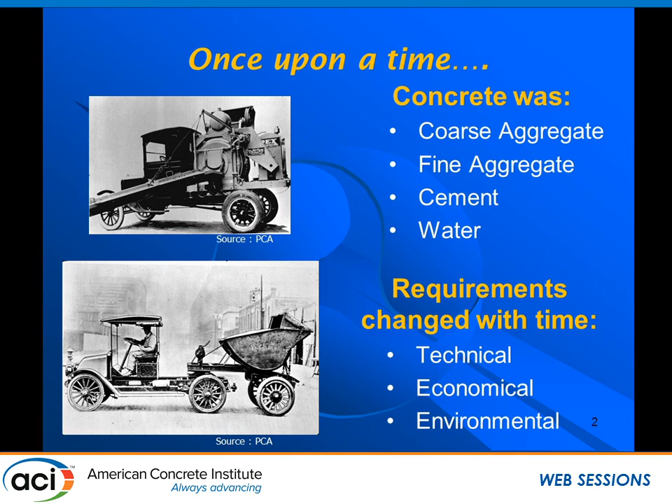When I went to school, not too long ago, back in Brazil, when I was a teenager in high school and first fell in love with concrete, I learned that concrete was coarse and fine aggregates, cement, and water. Since then, the technical, economical, and nowadays environmental requirements have changed quite a lot.

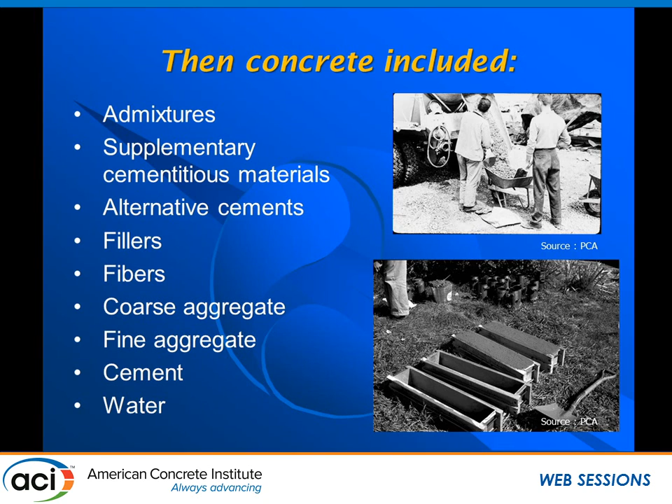We got to a bunch of different things that drive us nuts in the field: admixtures, supplementary cementitious materials, fillers, fibers, and our conventional concrete. Nowadays we've been trying to push the envelope more to use high volume fly ash mixes. We're not quite there yet, but we have to overcome some challenges first: delayed setting, reduced early age strengths, and increased sensitivity to curing conditions.

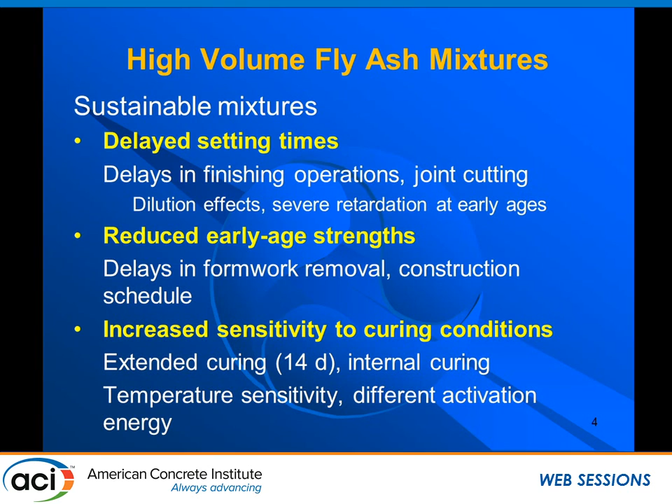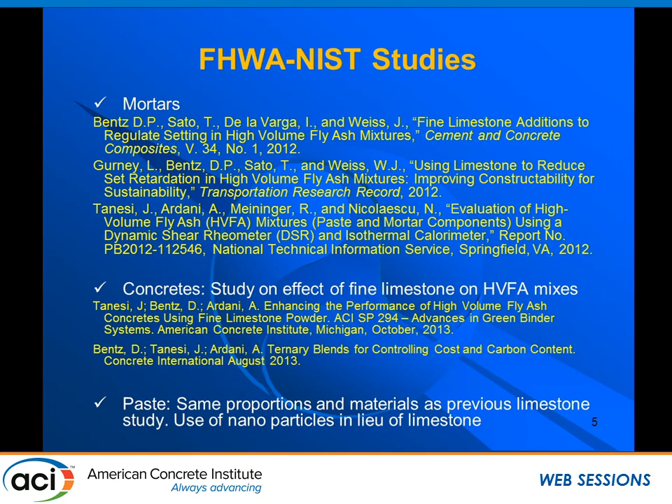Everybody talked about this in the previous presentations. In the past few years, both NIST and FHWA have been working on high volume fly ash, and we have some of our studies there. They worked on fine limestone additions, we worked on testing procedures, and together we worked on concrete mixes. So first we started with mortars, we went to concrete, and now we are stepping back to pastes, and in this case we are using nanoparticles as well. So here is most of my talk based on.

We have several mixes. We have a PC mix that was based on one of our concrete mixes from the previous study, and we replaced by volume, keeping the volumes constant - that's very important. We replaced the cement content by volume by 60%, either F fly ash or C fly ash, or a combination of fly ash and 15% limestone, or fly ash and 1% of different nanoparticles.

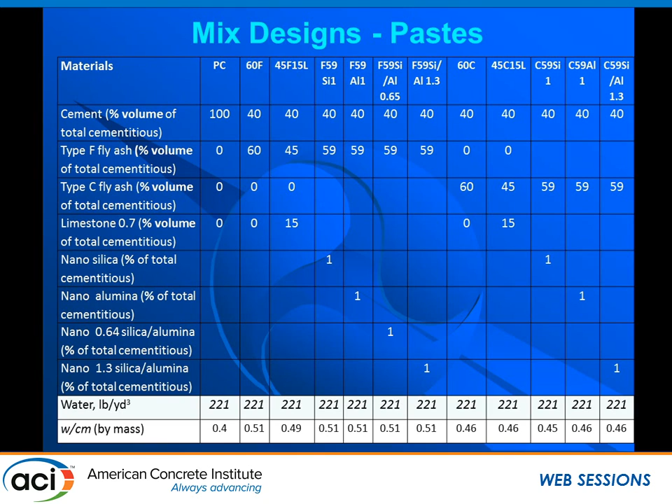Since we kept all the volumes constant, the volume of water is constant for concrete, the water to cement ratio changes in the different groups.

Let's have a look at the setting. Here in red is our PC mix. The greens, in both cases, don't look very green, but the greens are the fly ash and cement only. Then we have the 15% limestone in blue, and we see we accelerate quite a lot in both fly ash C and fly ash F mixes.

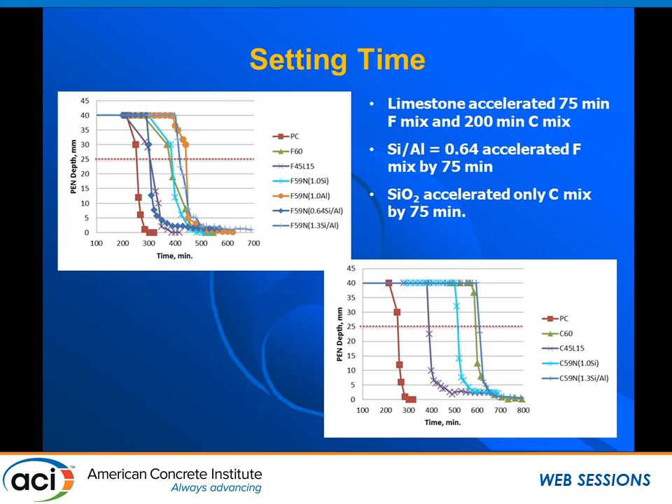We have for the F mix a 75-minute acceleration, for the C a 200-minute acceleration. Another mix that accelerated the setting was the 0.64 silica to alumina ratio, shown in blue here. All the other nanoparticles for F either did not accelerate setting or even delayed it slightly. For the C fly ash, the Nano Silica accelerated slightly, but not as well as the limestone.

So we ran rheology tests. Our rheology test protocol was: we had a pre-shear, then we increased the shear in 10 steps, and then decreased the shear in 10 steps. We used this curve to plot shear stress over shear rate, and with this curve, I have the slope as apparent viscosity, and the intercept is our yield stress.

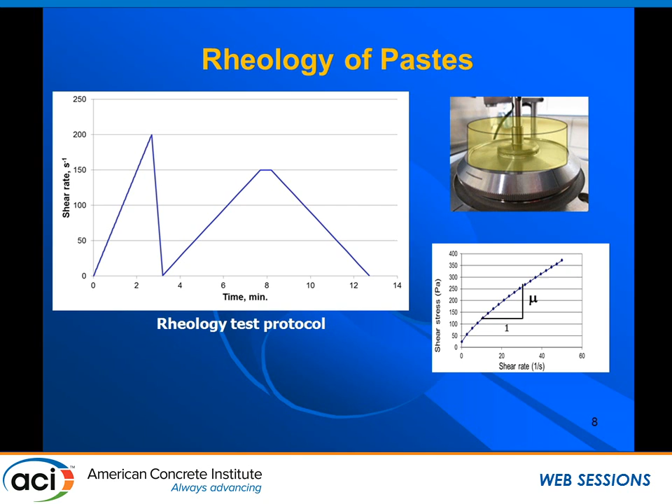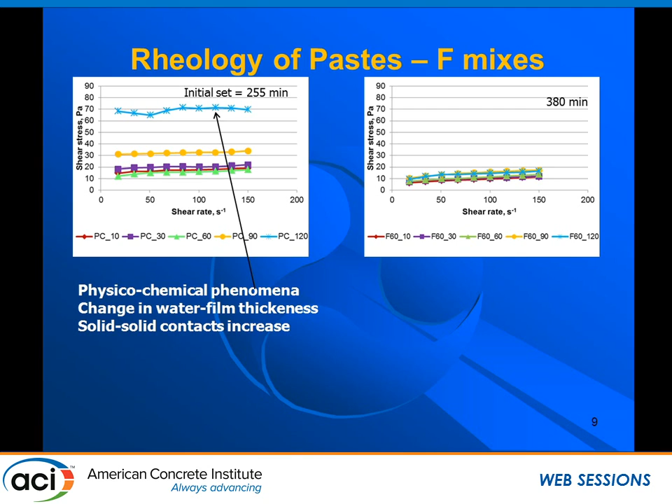Although we are not close to the setting time, we already see something going on. At 90 minutes, we see a change in the curves. What's happening here is that the water film thickness around the cement grains is changing, so the solid-solid contacts increase. For the F-fly ash mix, nothing appears to be going on - there is no apparent agglomeration at this point. If we look at the 15% limestone, again we see something happening at least at 120 minutes. For the Nano Silica, nothing is happening.

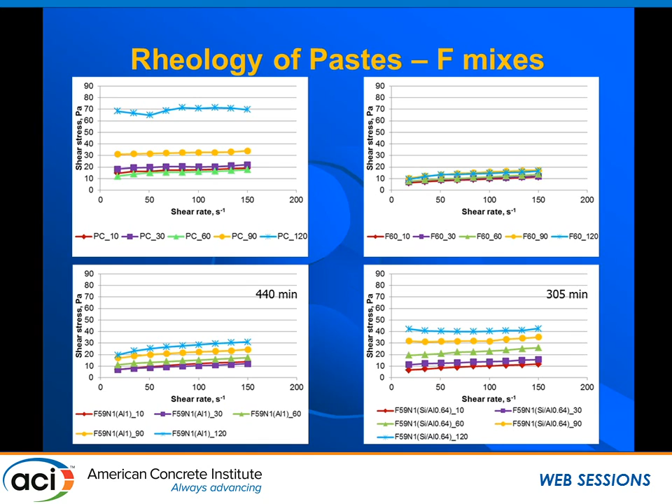For the Nano Boehmite, something seems to be happening at 120, but not significant. Then for the silica-alumina ratio of 0.64, definitely something is going on. Not only is it increasing, but the slope at 120 minutes is inverted.

What's going on? We believe agglomerates are forming, and as we increase the shear rate, we break those agglomerates. When we decrease the shear rate, these agglomerates are capable of reforming, so we get a negative slope, giving an impression of negative apparent viscosity, which isn't possible. We're really just seeing agglomerates forming - something in the microstructure is changing.

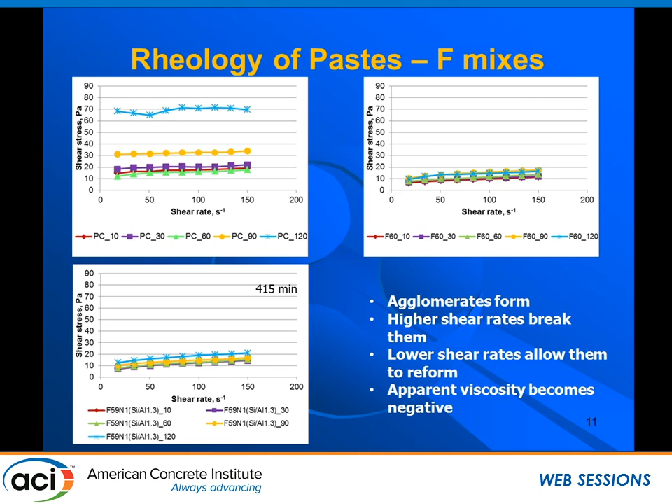For the silica-alumina ratio of 1.3, nothing seems to be happening again. Class C Fly Ash, nothing happening here, only fly ash. Again, the same thing - limestone is accelerating. Gaurav's talk was all about limestone acceleration, so we don't need to go there. We're just confirming his experiments.

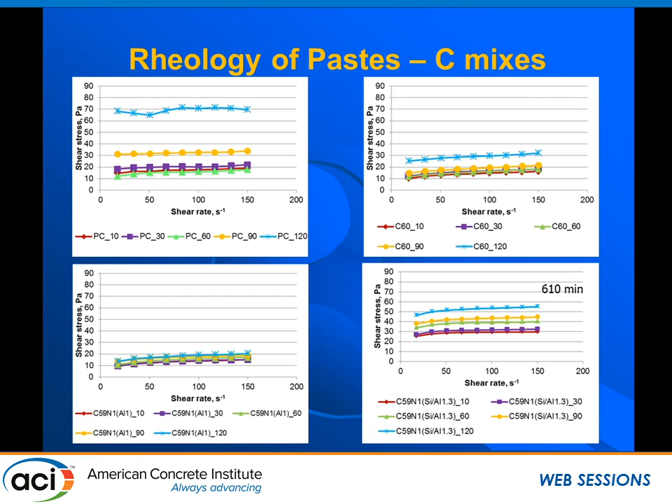It is accelerating, great. In this case, Nano Silica is accelerating, and it confirms our setting time measurements. Nano Boehmite doesn't seem to help at all, and silica to alumina ratio 1.3 appears to help slightly, but not much.

So if we plot yield stress over time, we see that for the PC mix, there is a jump between 60 and 90 - something is happening at that time period. For 15% limestone, again there is a quite significant change. And for the 0.64 silica to alumina ratio, something happens too.

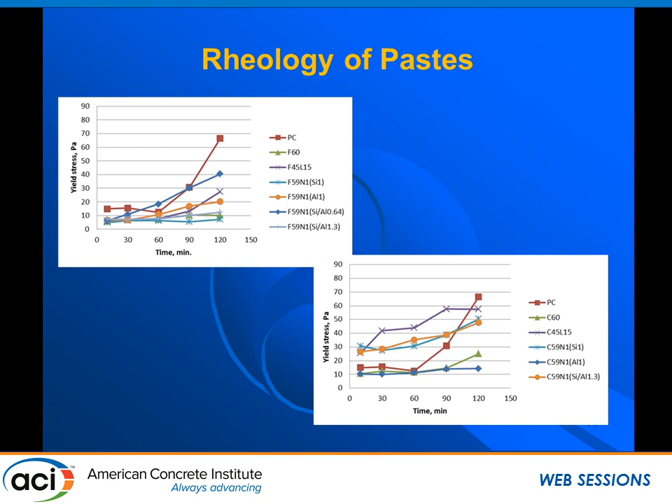For C Fly Ash, again limestone shows some difference, and Nano Silica shows a little bit of change - we don't have 0.64 here yet.

Calorimetry curves. You're probably tired of calorimetry curves today - I'm so sorry. But isothermal calorimetry helps us understand what's going on with the system.

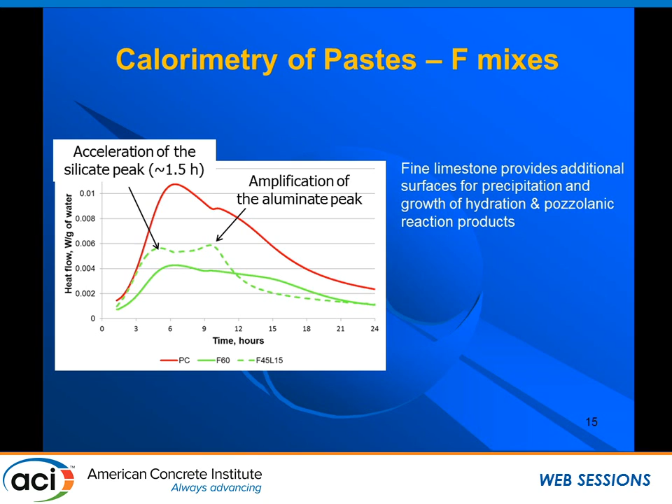So we have first the silicate peak for the PC mix in red and the aluminate peak. When we put in fly ash, there is a shift to the right - that is the delayed setting, and the peaks are much lower. When we put in limestone, we amplify the aluminate peak and shift the curve to the left, helping with setting time, because the limestone provides the nucleation sites.

So let's see what happens when we put in nano silica and nano boehmite. For the nano silica, the aluminate peak is amplified, but the curve shifts to the right even further, so there is a delayed setting. For the nano alumina, nothing seems to be happening - the peaks are even lower, and it didn't shift to the right.

When we put in the 0.64 silica to alumina ratio, we have a significant change in the curve. First, it shifts to the left and matches the PC mix. Second, the aluminate peak is significantly amplified, and it overlaps the silicate peak.

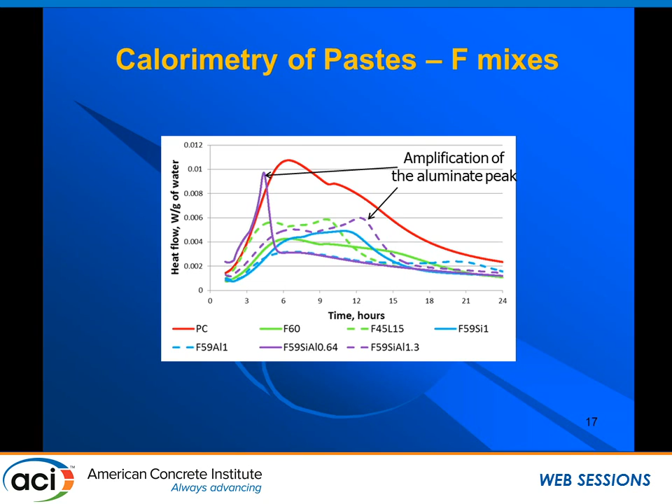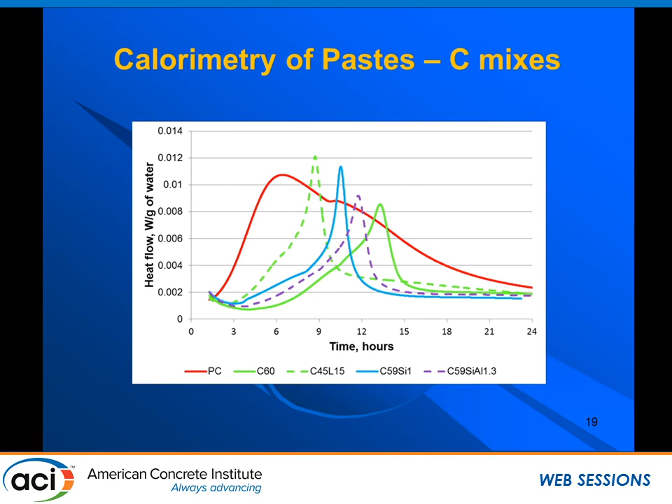And when we put in 1.3 silica to alumina ratio, that is again an amplification of the peak, but the shift to the left is not really significant. For the C Fly Ash it's again the same thing - limestone really helps with the setting, and when we put in nanoparticles, all of them helped slightly, but not as well as limestone.

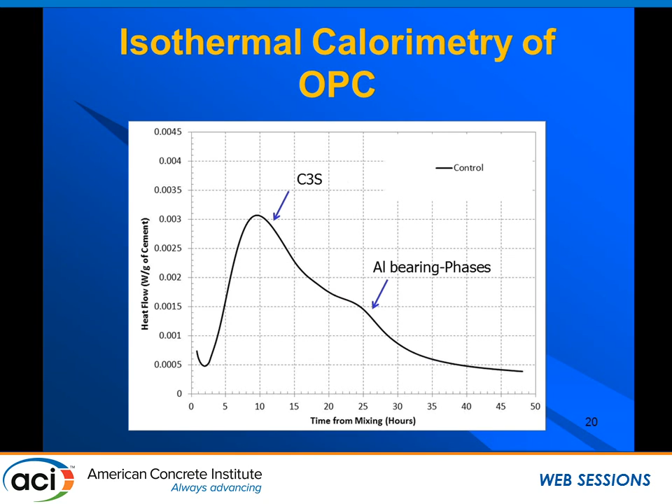So what is going on? We have here an OPC mix and the two peaks again. When we put in nano silica - no fly ash here - only 0.75%, in the previous slides it was 1% replacement, we see a significant shift to the left and an increase in the amplitude of the peaks.

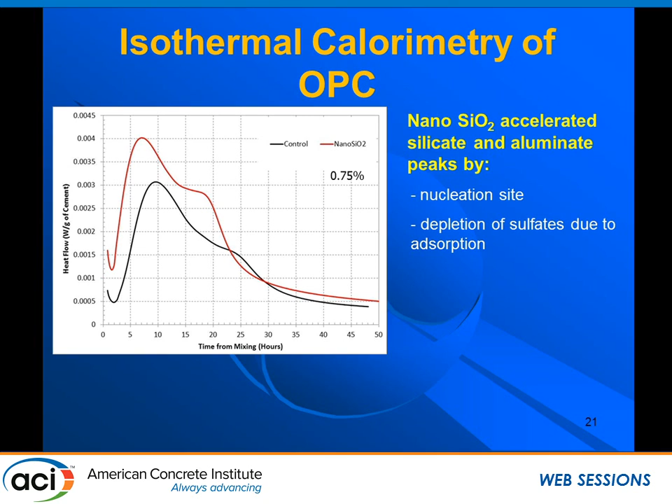Why? We believe we are providing nucleation sites for CSH and depletion of sulfates due to adsorption on the surface of the nanoparticles.

When we add other nanoparticles with different silica to alumina ratio, in this case 1.8 and 0.65 - 0.65 being pretty close to the previous slides with 0.64 - in this case 0.65 accelerates the peak by 15 hours. Why? Because on top of what we had before, we have depletion of sulfates with the precipitation of monosulfate, and instead of only precipitation or formation of CSH, we have formation of C-A-S-H.

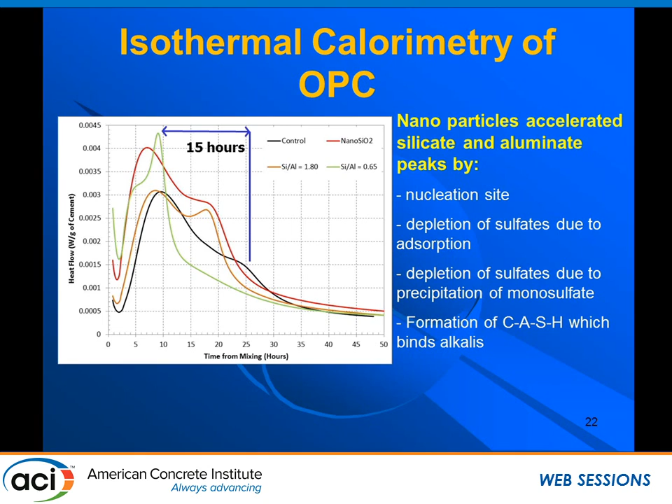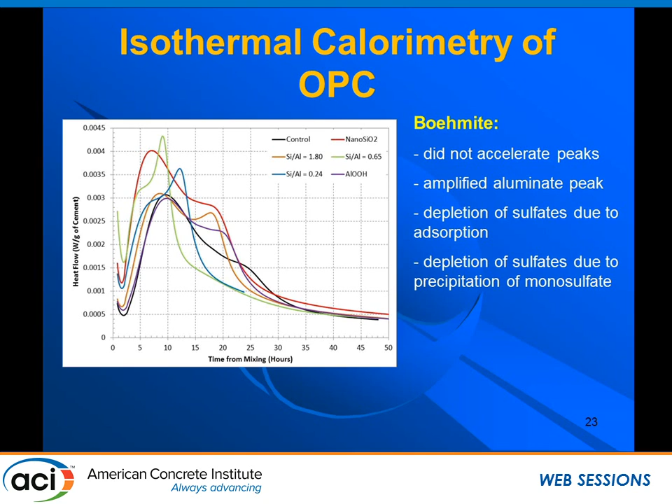When we add nanoboehmite, it did not accelerate the peaks. It happened with the fly ash mixes as well. It did amplify the aluminate peak, but it did deplete the sulfate due to the same two reasons I mentioned before. So what's happening here?

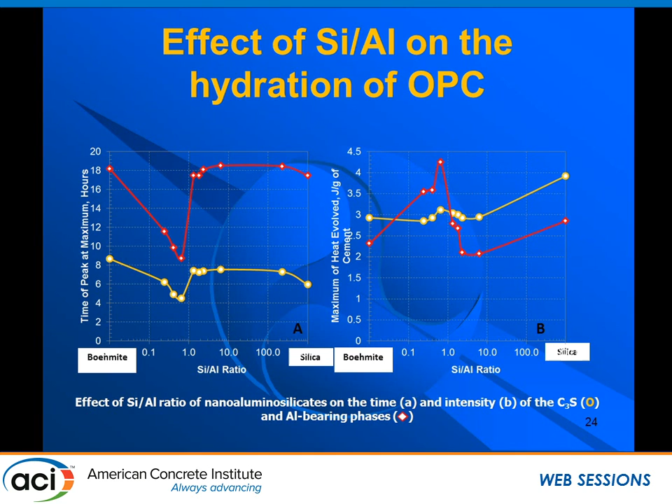If I plot time for the maximum peak of either the silicate peak or the aluminate peak over the silica to alumina ratio, it appears that we have an optimum silica to alumina ratio. If we plot the maximum or the amplitude of the peaks over the same ratio, we also see that there is an optimum silica to alumina ratio.

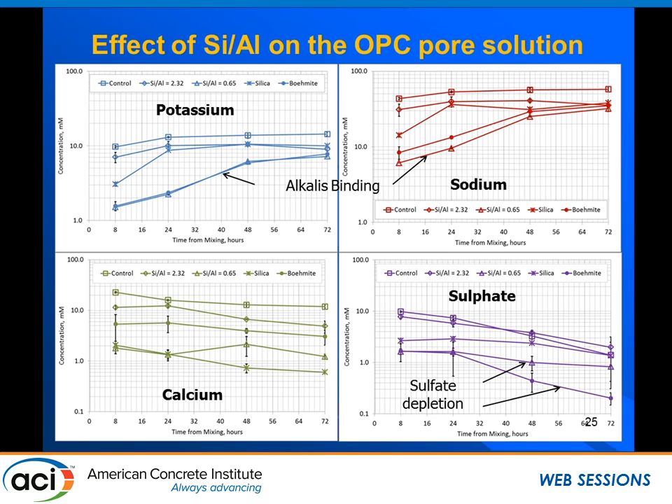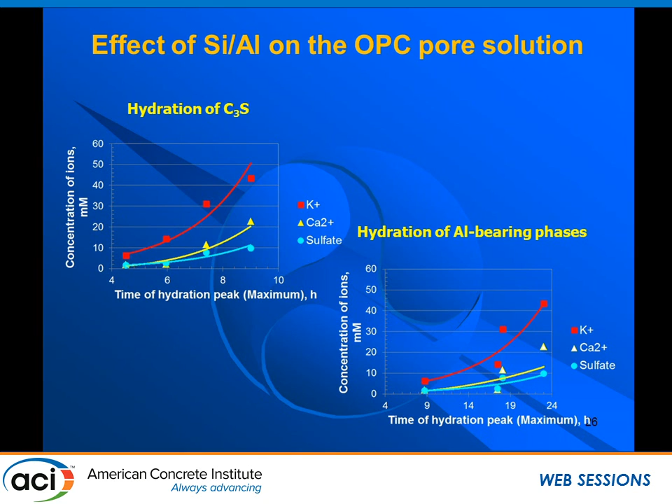So, is there any relation between the concentration of ions and the time that peaks appear? For the silicate peak, yes, it's very clear that there is a relation between concentration of ions and the time the peak appears. For the aluminate peaks, there is some correlation, but not as good as with the other peak.

Gaurav also talked about compressive strength relation with total heat and calorimetry curves. What we have here is a bunch of studies. We have PC mixes, high volume fly ash mixes, high volume fly ash mixes with limestone, concrete mixes, mortar mixes, and different cements.

What we did is total heat at 1 day and compressive strength at 1 day. When we measured compressive strength of concrete, the total heat was measured on the sieved mortar. When we measured the compressive strength of the mortar, the total heat was measured on the mortar or on the paste. And it's a very good correlation.

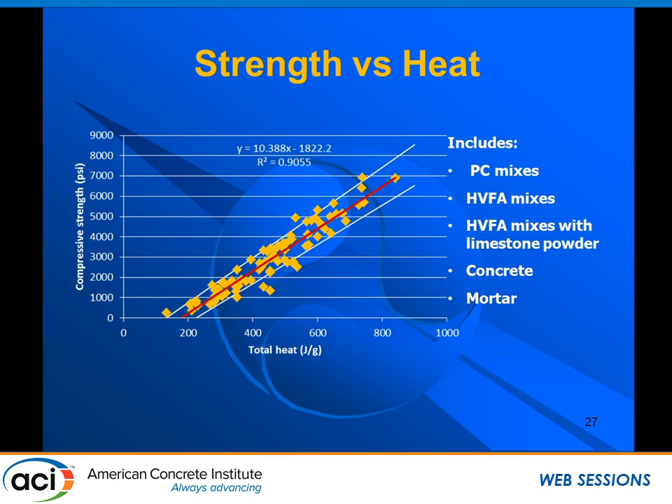Here is the 95% confidence interval. But for the paste that we just had with the nanoparticles, I didn't have 7-day calorimetry data. I had only up to 72 hours. So I decided to plot differently.

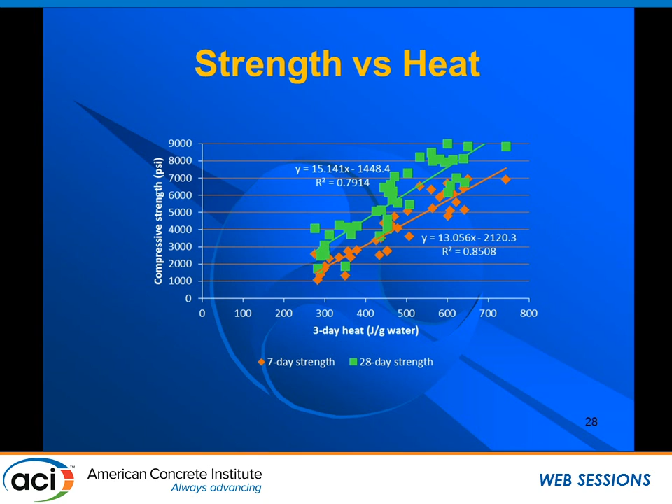I used the 72-hour total heat to come up with two other curves to predict compressive strength either at 7 days or 28 days. Here are the cumulative heats for the pastes that I just showed.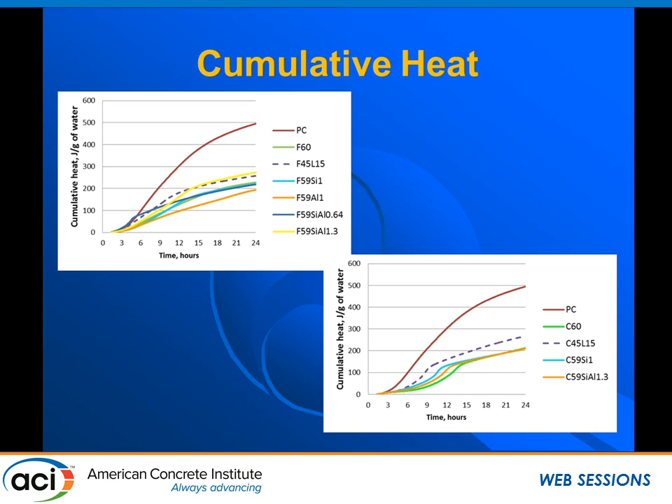Again, the PC mix has a much higher total heat. The fly ash mix is much lower - they are the green ones. When we put limestone, we increase the total heat. In this case, we increased with 1.3 and with 0.64. Here we didn't increase with anything.

We predicted the strength, and our main objective is to improve the early strength. It appears that, again, limestone improves the strength both at early age and later age, and we confirmed that with measuring.

And for the nanoparticles, we didn't measure - we are going to measure in the near future - but it didn't help at all. Here I have the base for the 3-day, and here for the 7 days. So it's either the same as the fly ash only mix or even worse.

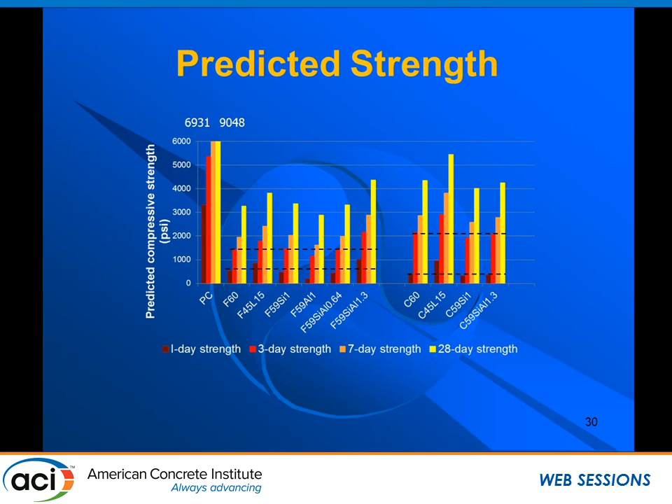Summary: fine limestone, everybody already knows, helps accelerating the reactions and helps with the strength.

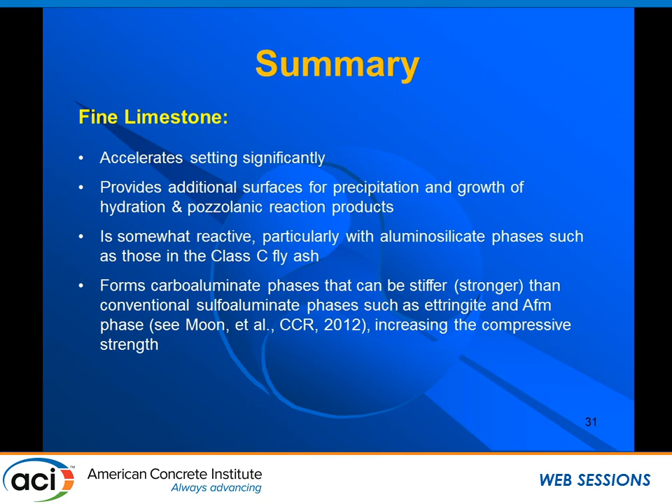Nano silica did accelerate setting, but only for the Class C fly ash. It did not change the cumulative heat, so we don't expect it to help with the strength, but it provides nucleation sites for CSH. For the nanoboehmite, it did not accelerate setting.

For neither of the ashes that we tested did it improve the cumulative heat, so we don't think it will improve the strength, but it does provide a nucleation site for the formation of CSH.

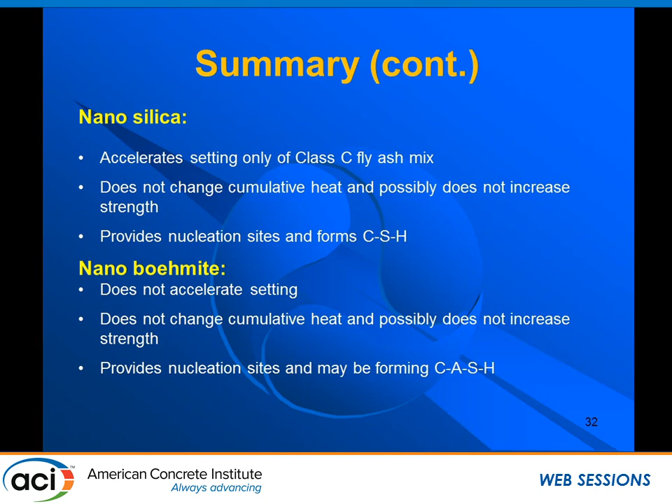What we don't know yet is, does CSH help with durability? We will see this later. We are not at that point yet.

And for the aluminum silicate, it appears to have an optimum silica to alumina ratio of 0.64. It helps accelerate setting, but it doesn't seem to contribute to strength. So it forms CSH as well.

So bottom line, limestone is better. It's easier, it's cheaper. But if the nanoparticles help with durability, that's a plus. For limestone, we measured in the lab some of the durability tests that we run, and it helped as well.